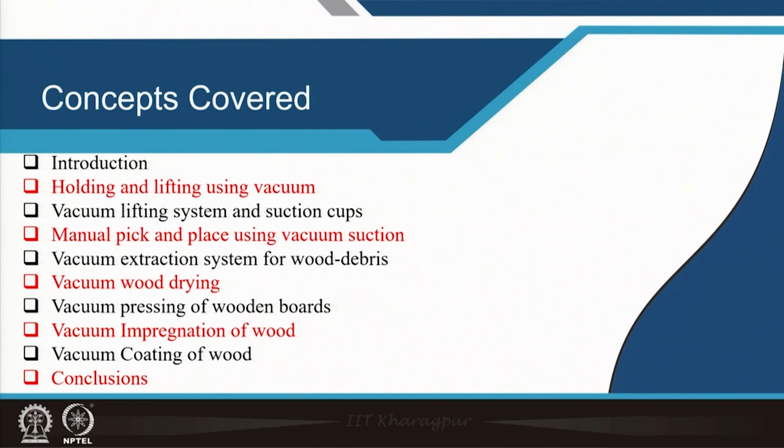In this lecture we are going to cover the following concepts. First, I will introduce the importance of vacuum technology for wood processing, and these processes are precise holding and lifting using vacuum, and designing some specialized suction cups for lifting, then pick and place in a precise manner using vacuum suction lines, extraction of wood waste and wood debris without any wastage using vacuum extraction method,

drying of wood to the required level so that longevity improves, then pressing of wooden boards to different shapes to meet the demands of society, public in general, vacuum impregnation of wood to make the wooden products more reliable and stable with longevity and strength. Finally, we will also give some good looking coatings on that wooden products to get good beauty as well as duty, okay? Because wood should be strong, wood should also be good looking.

Okay? So, then we will see some conclusions how vacuum technology is going to play in this woodworking, which is very much required for human race. Nobody can say wood is not required, because since time immemorial society is always using wood as much as metals or any other constructive materials.

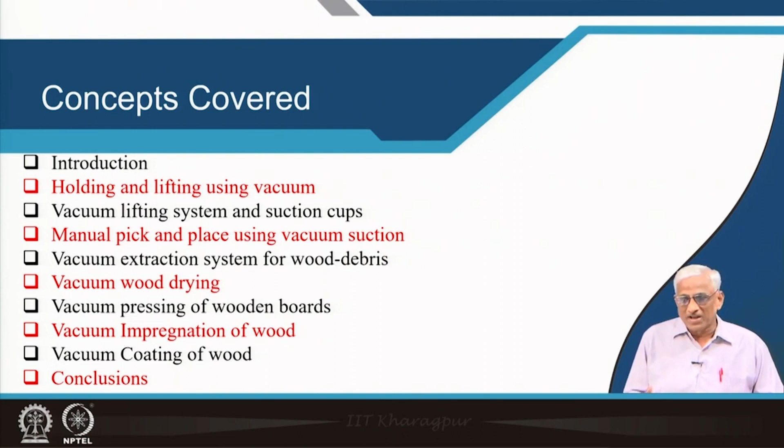In fact, wood is needed in day to day life, but as time passes with increase in population, with forests decreasing, the wood is going to be a very costly commodity. So, after some time wood will slowly become a possessive property of individuals. I have so much of wooden furniture. So, naturally we have to preserve this wood as much as possible. We have to maintain the forests with minimum wood consumption.

All that depends on minimizing the wastage, and even during processing of wood, if you can store these debris etc., we should do it, and with that debris again you can make panels. So, we should have innovative technologies to preserve and conserve wood and wood products. In that connection, vacuum is going to play a very important role.

Here are a series of applications of vacuum technology in wood processing, rather woodworking. Carpenters always say woodworking shop floor. If you observe here, we have right from holding and lifting in a precise manner very large wooden panels carefully, and we can impregnate them in some sort of ovens, vacuum ovens. If required, we can dry them even at the initial raw level, so that moisture is reduced to that level which is beneficial for wood processing.

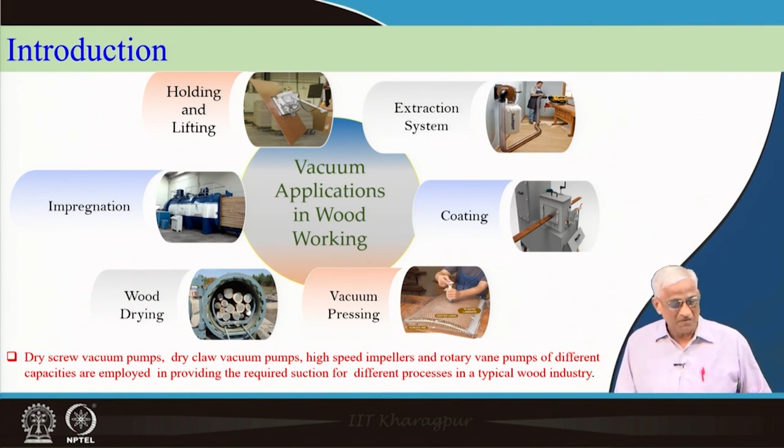So, all these things give a panorama of applications of vacuum technology in a typical modern wood industry. So, let us see one by one. First one, holding and lifting.

We can hold with our hands, but sometimes it may cause accidents, sometimes it may bend unnecessarily, and manually we may not be able to give enough respect to very costly wooden panels, neatly taking it and arranging things. It may not be possible, and different people will do it in different manner. There cannot be standardization. Whereas, if there is a robotic arm which can handle better than us and in a more reliable manner, neatly and gently it will catch the panels, transport them and finally keep them at various angles, swiveling, various operations can be done, because robotics is well established and well developed nowadays.

So, that can be extended to the vacuum technology with suitable arrangements, so that we can pick, transport and place anywhere. It can be placed for stacking, it can be placed on a lathe, it can be placed near a saw. Everything can be done in a precise, neat manner with minimum energy and in a good mood of the person concerned, with minimum effort and maximum precision.

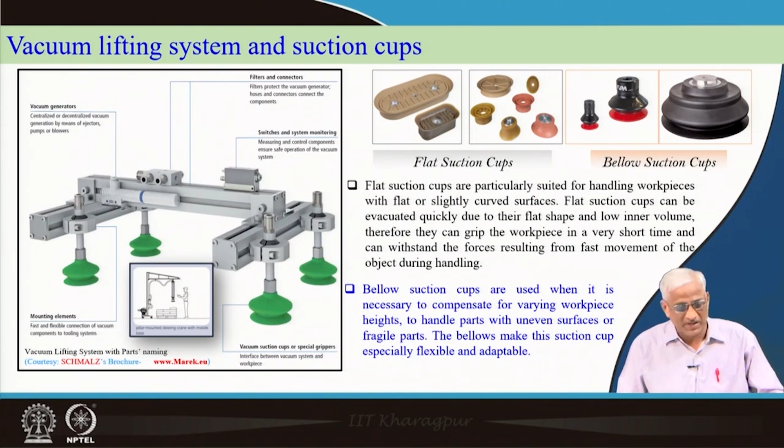These cups, such arrangements are now commercially available. There are companies who manufacture these things for wooden floors, and I believe a startup can easily come in any place where they can also do it. This is just a mechanical arrangement, and you have to connect it in your wooden floor to the crane, that is all. Anyway, I will not discuss more about it. This is typical mechanical engineering. You can go through it, and there are lots of publications available on this topic. Even in Wikipedia you can find a lot of interesting stories, very good images are available.

Before I go to the next aspect, I want all of you to appreciate this lifting operation by looking at a small video. With the permission from Schmalz, courtesy from them, I am going to show this.

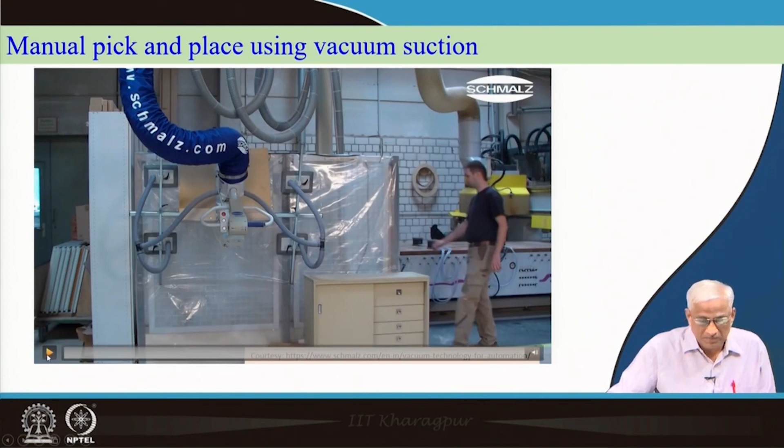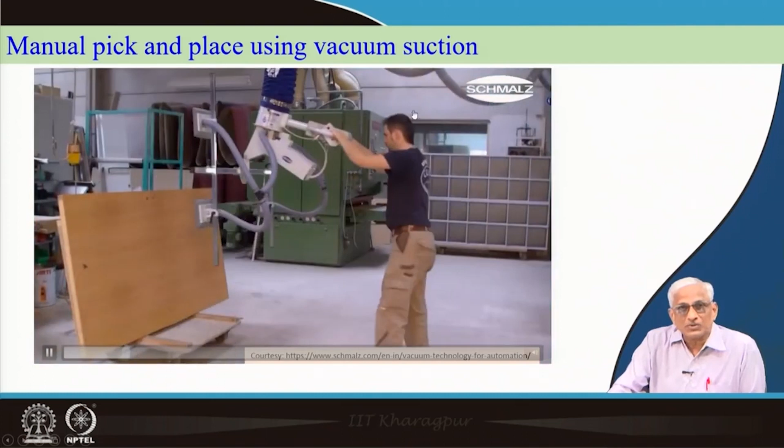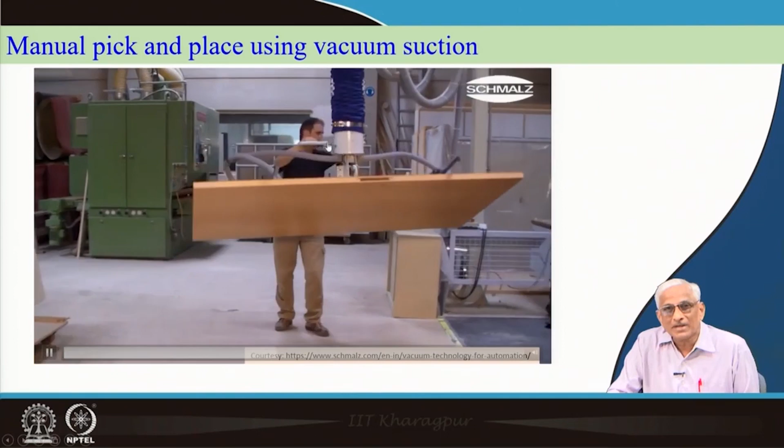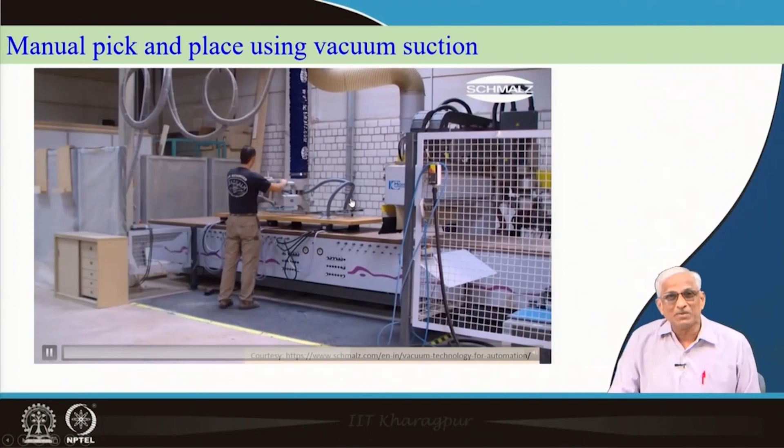So, there is a vacuum pump associated with this suction line, and these are the cups, and they are holding it. Vacuum is created, and it is now being caught by these 4 clutches. Uniform pressure is there. See, you can lift it nicely, and very carefully the operator can navigate it to the required place, pick and place nicely. So, this way he is not spending much of his energy, but he is utilizing his skill very much.

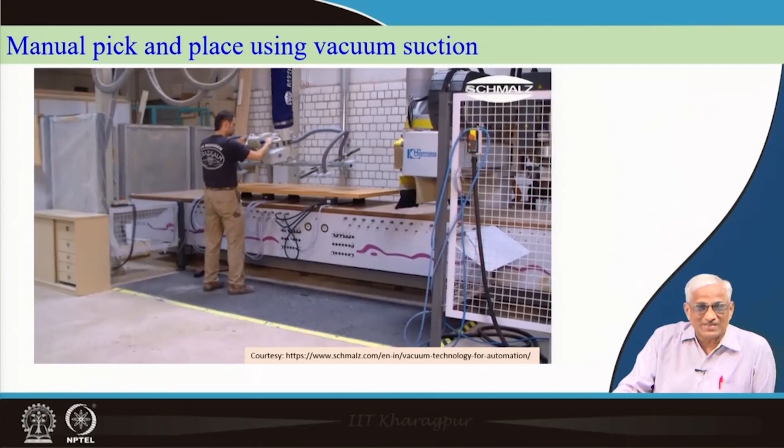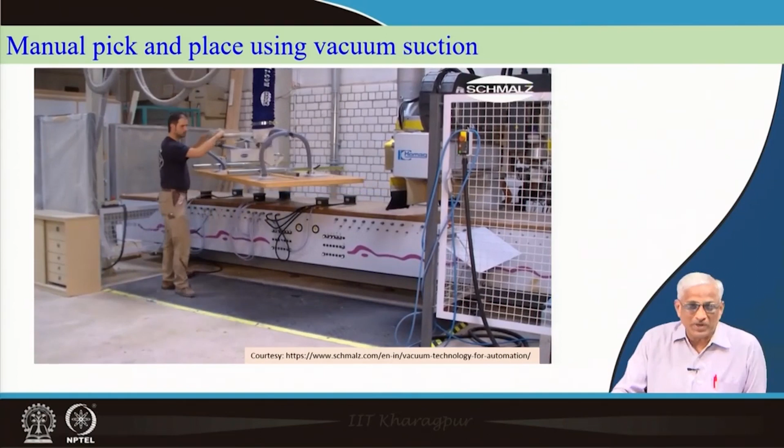So, this way it is very comfortable to the operator as well as the pieces, because otherwise if you do an operation in a non-gentle manner, most likely such costly wooden things will be broken, and also they will be misplaced somewhere instead of placing them properly. So, that way for stacking, placing and all, this vacuum suction is going to play a very important role. So, this is the first application of vacuum in modern wooden industry.

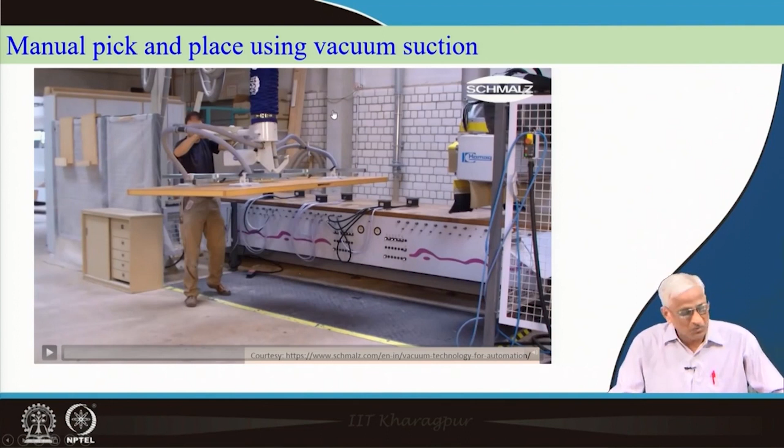Okay. The next application is extraction system. I told you there will be a lot of waste, dust and small pieces when you put it into various operations like cutting. Of course, unlike metal work, there may not be much work in the lathe operation, but there will be many other works in the saw operation, etc. And similarly, varieties of operations go on, as you know, in the typical carpentry shop. In fact, the carpenters know much better than all of us, because every carpenter has got his own style of work.

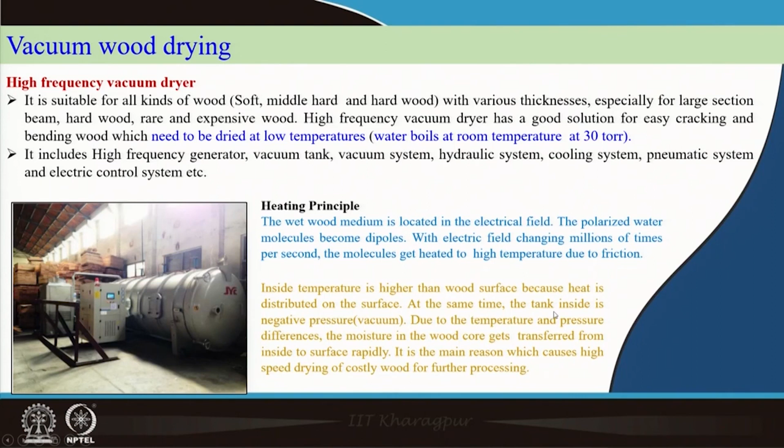So, that way automatically a little bit of heating takes place, and with, I should not say negative pressure, but people sometimes call it that, so I am also using that word, otherwise it is vacuum, because with respect to absolute 0 there is nothing called negative. And wood slowly gets into a different shape with much less moisture, and the quality of it will be improved, and that will be sent to further processing.

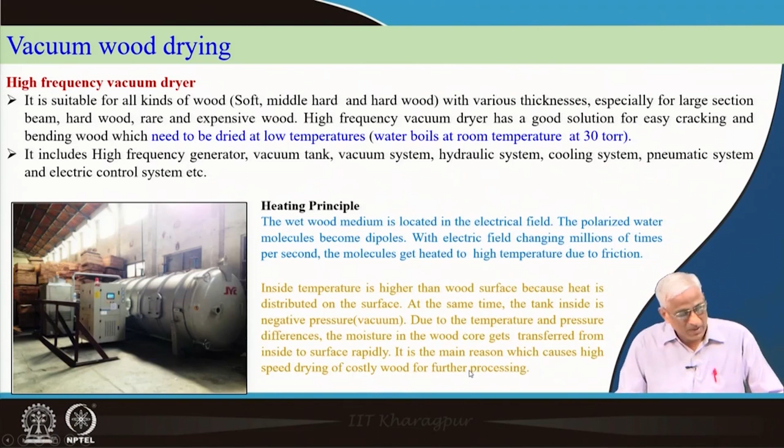Okay. So, we have improved the quality of the raw wood etcetera, but there is another operation called vacuum pressing of wooden boards. What for? This is a very costly application, but many people are willing to spend money, because they would like to have wood in different shapes, beautiful curves, to have very high quality furniture in their front room. Okay. So, vacuum can be used, P 2 minus P 1 into area, I told you several times.

It can be used to press the wooden boards into different styles, and we can use this pressing force to even change the shape of the wooden panels into different curved shapes, and that is possible by keeping a piece like this wooden piece into a small bag and removing the air, and then it will slowly start taking that shape because of the huge force falling on it, and we will have to see to it that it is a permanent effect.

Okay. So, some operations have to be there before you load it etcetera, and people have got a lot of expertise in all that. It is very good for plywoods, and it is done slowly, gently, in such a way there is enough time for it to readjust slowly, and it takes the shape. If we do it fast it may crack. Let us see how it is done.

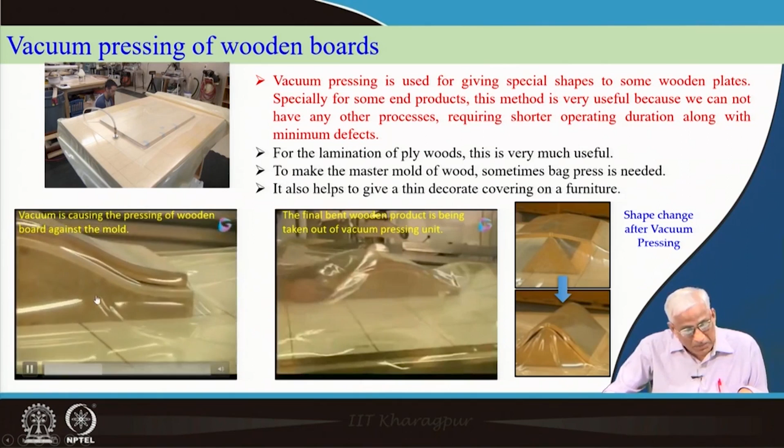And once it is done, the final wooden product, you can take it out and release it from the former, and it looks like a beautiful shaped piece. You can use it for your name boards etcetera. So, that type of products are possible using vacuum, vacuum pressing or vacuum molding. So, this is before vacuum pressing, this is after pressing.

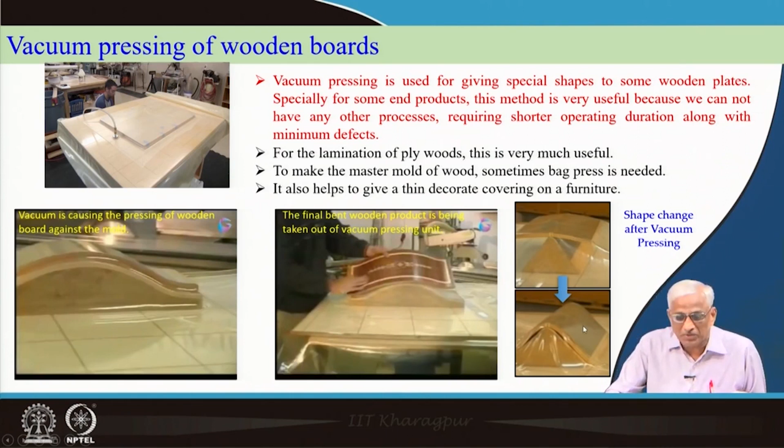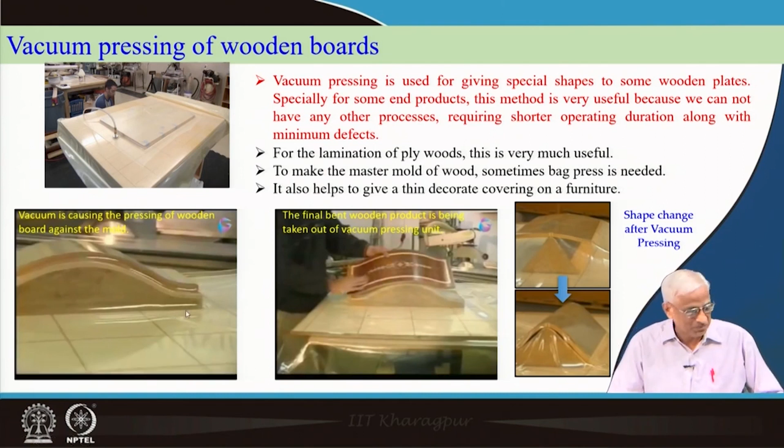Okay. After that, at times it is required to impregnate the wood, because impregnation is done in the electrical industry also, where chokes and high voltage things etcetera are impregnated, so that moisture will not re-enter there, and it becomes hard. You try to impregnate it with some adhesive and then dry it again. That impregnation is done under vacuum.

Why? Originally moisture was wetting the wood, and that is being removed by drying. Now we are trying to pour some other material, which we call a preservative liquid, and that will go into every nook and corner, because initially it is evacuated, and those vacuum cavities will pull the impregnating adhesive towards them. So the entire wooden product in 3D will be properly and uniformly wet.

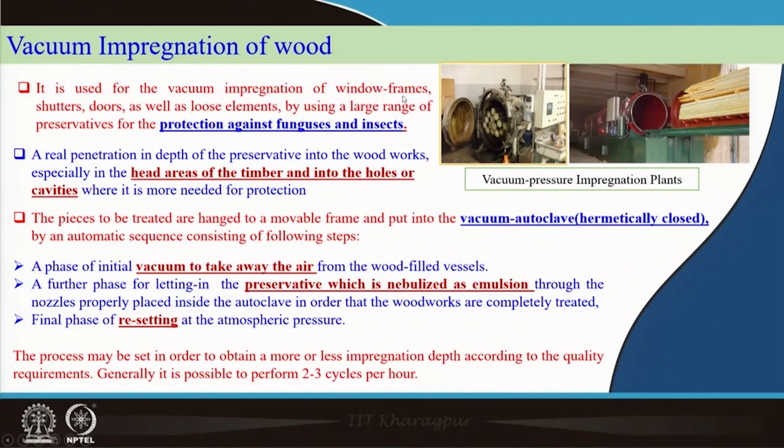Then when you dry it, that is called setting time, it will be quite hard, longevity improves, it looks much better, and pests will not eat it away, and it has lots of applications. So vacuum impregnation is used for window frames, shutters, doors as well as loose elements. This gives you protection against fungi and insects.

This is the most important point, because if you purchase a costly wood and do lots of processes using high-tech things like vacuum pressing, lifting and shaping, and finally after 2-3 years it is gone, you will feel bad. It should work for 20 years. If necessary, you will pass it on to the next generation. People do that; old wooden furniture is still being used even now. So they must have done some impregnation at that time.

That time it was very costly, maybe only very rich people could afford it, but with vacuum impregnation, it is just a tank into which you let these wooden things, either raw wooden planks or simple semi-finished plates, into that vacuum vessel, and close the door. Of course, it is the same as the vacuum furnaces we have seen; the door must be carefully closed and all the vacuum precautions taken.

When you vent it also you should be careful; if you vent it a little to over pressure, that P2 minus P1 into area will create an accident. The wood will be good, but the person may not be there. So we have to be very careful when doing this vacuum impregnation for wooden things.

Well, I have written here a variety of things: how the cavities in the timber, the various holes and head areas of the timber, are penetrated by the preservative because the vacuum creates a force, and I have also given some ideas on how it is kept in a hermetically sealed vacuum autoclave. How to make these chambers, thickness calculations and all, we have seen in earlier classes; that is the same for everything.

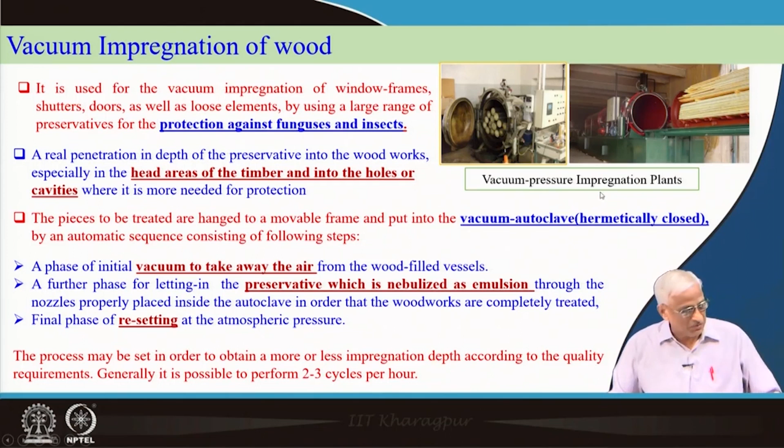Now you vent it to atmosphere and reset it at atmospheric pressure, if necessary with a little bit of heat treatment, and generally if you do 2-3 cycles per hour, you will get sufficiently high quality wooden products on a regular scale in a modern wood shop floor.

Similarly, if you are not satisfied at that level, you can give an additional coating. This also increases the life, the beauty, the smoothness and the surface finish. So vacuum coating is like any coating we have seen in earlier lectures, or typical bangle coating or decorative coatings. This is also a coating.

The only thing is, instead of a costly substrate as in the semiconductor industry, we have a substrate which is a wooden piece, but we give it enough respect, because these special quality woods are very rare, particularly as forests are going down. So you should have not only impregnation, removal, drying, picking properly, and preserving all the dust that is collected, but you should also make good coatings on it, so that it will stay longer.

So, lots of industries are now coming forward to do this. Though it looks like a little laborious thing, for very costly woods it is done. I request all of you to go through these things; I am not going to read them out. Basically, you have to decide what it is you want to coat. It can be a small layer of primer or some other thing with which you try to coat it, run this, and you will get a coated thing on the other side. It is an automatic operation; several companies are manufacturing these.

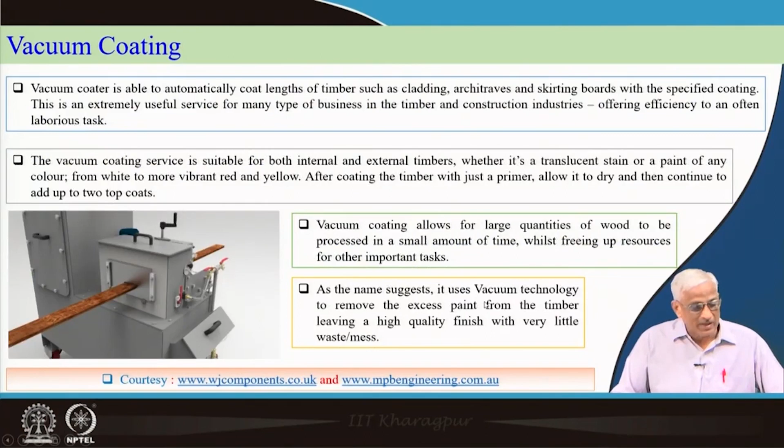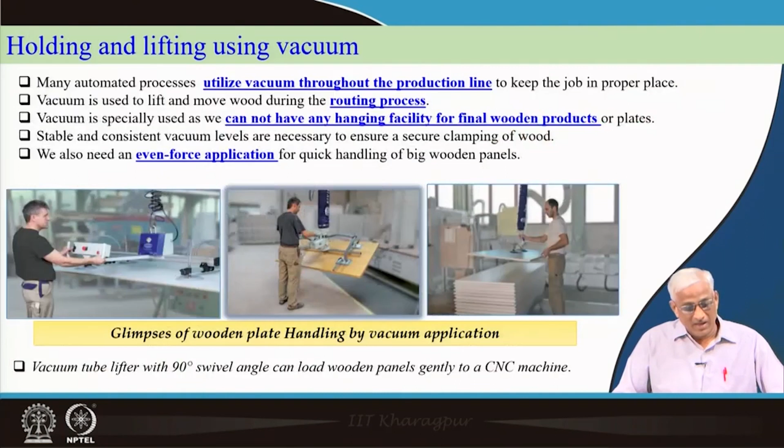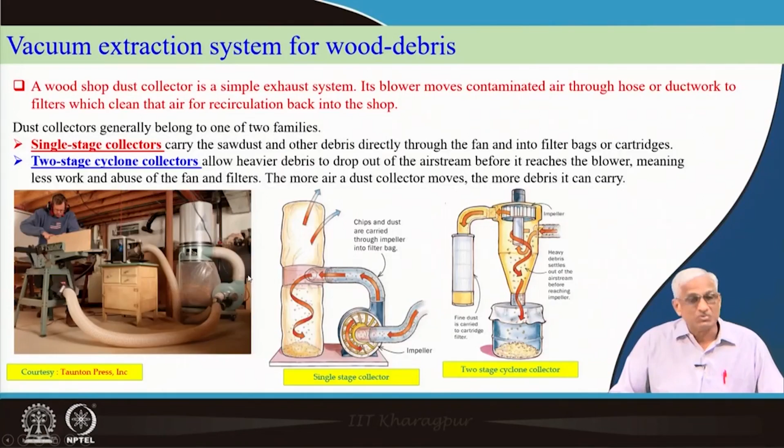Okay. So, we have seen coatings, we have seen impregnation, vacuum pressing, vacuum drying, vacuum extraction, vacuum pick and place, and a variety of applications. With so many applications, when we cover all these things and really start using them, I am sure you will be paid back, because quality wood is going to play an important role in future life, particularly for future generations, because wood is going to be a rare commodity. You may get plastics, electronic goods, cell phones, anything, but you may not get very good quality wood to make good quality furniture or any other product at your place.

Okay. So, in conclusion, vacuum technology is used in the modern wood industry for different processes like drying, vacuum impregnation, and forming wooden products in various shapes. This is also vacuum forming in a way. It is not just bending; you can bend it the way you want. Precise picking and placing — precise is very important. Anybody can pick anything and throw it; that is called throwing, not placing. When you try to pick up something from somewhere, a lot of things will be left over there because other things get disturbed, whereas with precise lifting and precise transporting there is nothing like that.

Okay. So, the wooden panels, which are very important for construction, have to be handled nicely, with clear-cut extraction of wooden debris. This is going to be the cost-effective solution for the wood industry. Vacuum processing of wooden products adds value to them, with precise control, long life and safe handling of debris, and it is comfortable for the workers. Environmental pollution is also reduced by incorporating vacuum technology on the wood shop floor.